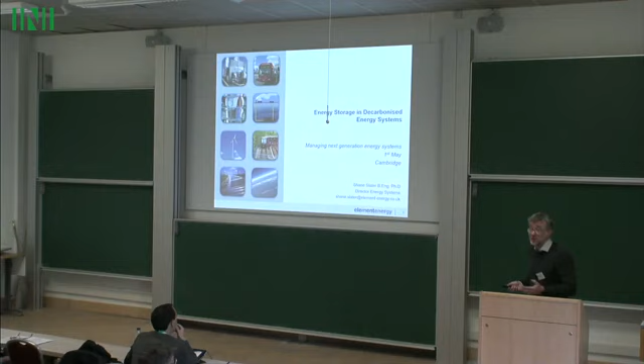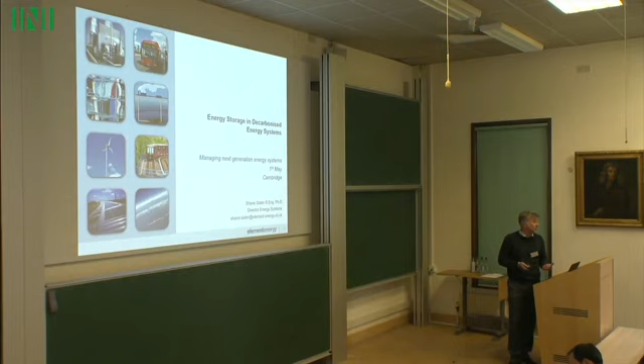So I'm Shane, I'm Director of Element Energy. We're a consultancy, and we focus on trying to solve problems in the low carbon sector, which is almost intractable—pretty hard. Sometimes one feels somewhat in despair that things are moving very, very slowly.

But we focus on low carbon systems and trying to solve some of the problems there. I work in our smart energy systems team. What that means is that across all the areas we work in, we're able to pull everything together, and we try to take a whole systems approach to solving decarbonisation challenges in the energy sector. They tend to be longer term, so we're looking at issues out to 2050, how do we decarbonise, and they're multi-vector—transport, heat and power as well.

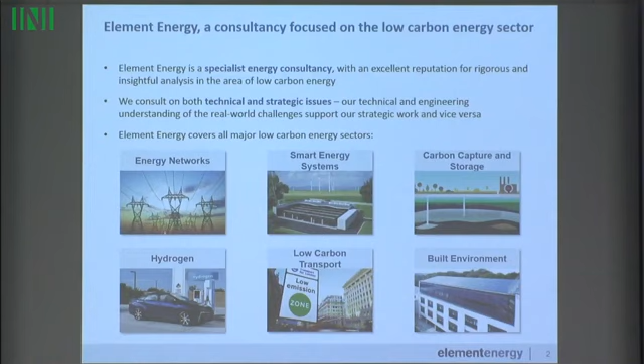I'm going to talk to you—most of the talk today is about one of the projects we've worked on fairly recently. There's three sections to the talk. I wanted to spend two slides talking through what's happening with storage now. It's really exciting—I've been working in decarbonisation for 20 years, and there's not many sectors that have been sustainable, where you can really see things like the train leaving the station. Stuff is really happening, and it's kind of not stoppable. Storage is like one of those things now, and that's really nice to see.

But it's a very, very challenging environment for storage still. I'm just going to talk about the UK for most of the talk—that's kind of now. Then most of the talk is going to be for 2050, looking at the long term, what the role of storage is in a decarbonised power system. That's coming out of some work we did recently. And then I'll end with some insights from that work about how do we get from here to there, because where we are now in terms of our power system and what it would need to look like in 2050 is going to be very different.

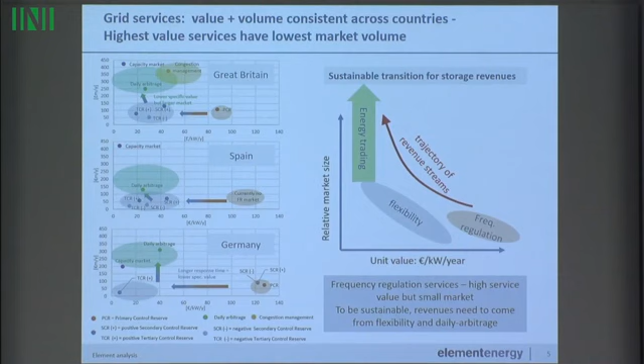So if you look at what that means in practice, on the left-hand side there's an annual report that comes out from one of the industry bodies for storage in the UK. These percentages show various people putting battery projects together have been asked, well, what revenue streams are you reliant on for your battery project? And quite a few said frequency response—these kind of fast-acting, relatively high-value services.

Quite a lot. So this is a service to the system operator. More talked about is peak charge avoidance, so really this is about avoiding charges, network charges, primarily avoiding network charges maybe on transmission and distribution. That's really important. But then there's other stuff as well, like capacity market.

But arbitrage is pretty small, so arbitrage for the moment isn't the big thing that carries you over the line. It might be a component of your revenue stream, but not everything. There's a spectrum of services that batteries need to provide, and I guess you need to stack them on top of one another to make it work.

Without reading all of the stuff on the left-hand side, I guess the point I want to make is that it's really hard to predict where your revenues are going to come from, even in the relatively near term. There's been a lot of people doing an awful lot more work on these markets than I have, and their predictions have been way out from what's actually happened in practice.

So whether it's firm frequency response that has eroded enormously, or rule changes on the capacity market which meant your battery now needs to be almost 8 times bigger or more expensive than you thought you needed to have—and that hurt quite a lot of people—or huge amounts of competition, it's really strange.

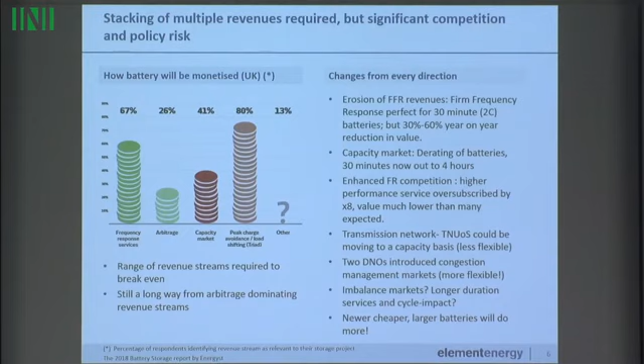There's some really interesting tensions with regards to which bit of the system is going to reward what kind of flexibility. But the main part, I think the opportunity is there. It's still a kind of nervous industry. I think everyone is sure it's going to grow, and people have got their eyes on the medium and longer term, and there's no doubt that battery capacity is going to increase.

So I wanted to look at the 2050 picture now, scoot to the long term and see what batteries or energy storage might do in the long term in a fully decarbonized power system. The slides will be available so you can follow the link as well if you like.

This report was published, I think, last month, and it was a study that we did. It was a pan-European study, so we looked at a whole system approach—electricity and gas—and we looked at a variety of end uses: heat, power, and transport as well, lots of different sectors.

I guess the exam question was, what happens when you decarbonize the electricity sector, and also all of these other sectors as well? And I guess this particular client had a particular perspective—this client wanted to try to balance, I think, a bit of the debate that was happening in the public sector.

They said, look, we want you to push electrification as far as possible. So we want you to electrify, not on the supply side, because that needs to happen anyway, but on the demand side - let's electrify as much stuff as you can, basically heat and transport.

But everyone is aware that particularly heat is tough - I can show you a slide on that in a minute - electrifying heat is really hard. So I guess the hypothesis was, let's see how far you can go with electrification as a core plank of your decarbonization strategy, but then acknowledging that molecules and natural gas is a great way to

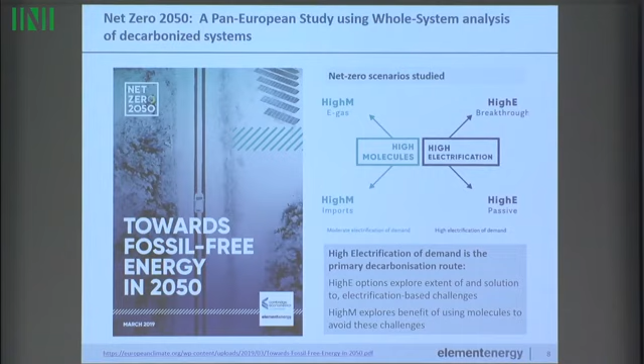get energy to people's houses for heating in winter. Acknowledging that could remain the case in the future, what might be the role for molecules in delivering energy to people? Of course, they would need to be zero carbon molecules, so they need to be created in a different way from now. So just kind of setting up the storage issue, I guess.

So we looked across Europe, but one of the hypotheses we had is that when you have a zero carbon electricity system - reliant very heavily on PV and wind, and more of the things we saw this morning - you're going to need a solution to the system that gives you security of supply for every hour of the year.

So that system is going to be driven by two things that are causing you problems. One is the variability of renewables on the way in - I'm sure you all realize this - but then also you have variability of demand, in particular heat.

And then of course the third variable is that in some countries you have gas infrastructure which is more widespread than others. So really when you look at the seasonality of renewable supply, the seasonality of demand, and gas infrastructure, you can come up with a number of different archetypes or different kinds of countries, and you can see how the solution is different between those countries. That's interesting, because the same 2050 solution doesn't work everywhere.

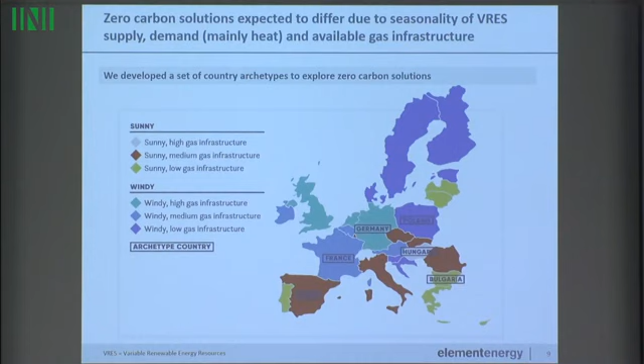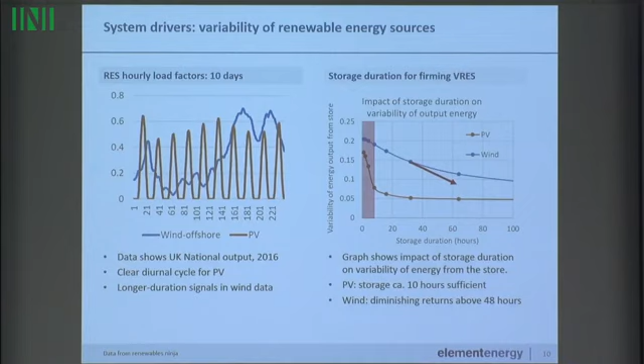You might expect that, but obviously not for wind - it stays fairly variable for a long period of time. There's no right number, but 2 days is a lot of storage if you're going to try to balance wind. Beyond that, you have to ask yourself why you're doing it and what the value would be, because it's diminishing returns and your performance is not improving.

This is the thing that really drives a lot of the solutions: heat. This is a peak day in Germany - we don't know what the actual peak day will be in 2050, but that's what we have in the model. We have baseline electricity demand that we're predicting, but the point is all the reds here are different kinds of electrified heat, and the blues are different kinds of electrified transport. Electrified heat is a big issue - it will double, at least triple, your demand at peak times.

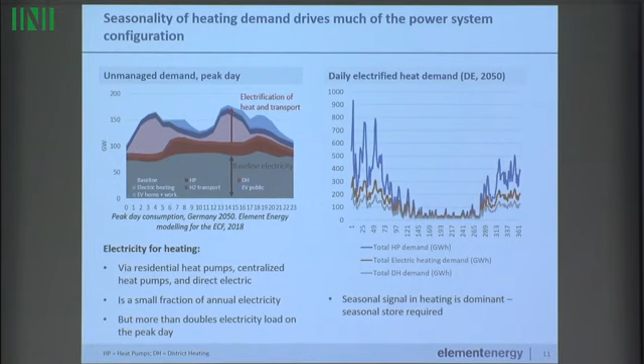That might not be much of a problem, because if that was sustained over long periods of time, you could build a network and get economic value out of it. But the problem is, this is pretty much the same data shown in gigawatt hours over a year, and there's very little heat demand in summer. So you have this seasonality, and if you tried to apply storage duration over longer hours like before, it wouldn't touch this heat signal until you got to 6 months or longer. So if you want to firm up the demand side, you need a seasonal heat store.

I'm not going to go through this - this is the dispatch calculation module we used, the slides will be available. On this piece of work, we'd seen a lot of information on how people dispatch the supply side, but not as much work on flexibility on the demand side. We feel the two in the future need to be treated equally - flexing demand within constraints is as important as flexing supply. We also have a model of networks in there, because networks constrain you a lot if you don't make them bigger.

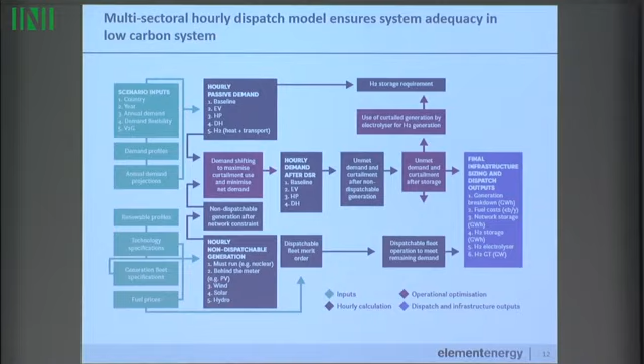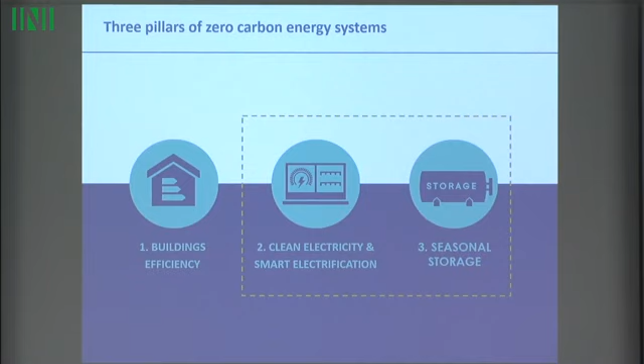Like good consultants, we have to come up with simple messages from our work. The various things we showed are building efficiency, clean electricity, smart electrification, and seasonal storage. I'm just going to focus on the two on the right here.

This is a useful graph - the net load over the year, organized from peak positive net load to peak negative net load. Net load is the load after you've put renewables on the system. You get these two triangles: in this one, you don't have enough renewable energy on the system and need some form of dispatchable backup - you might have an awful lot of biomass. Here you have too much renewables and have to curtail it. Since this is a zero carbon system, the objective is to try to flatten this line, to minimize the area of these two triangles.

There's some demand side response that improves the situation, makes those areas smaller. But after battery storage, it's really interesting - you find, particularly in Spain, you're able to economically deploy a large amount of battery storage because you only need 10, 12 hours. In a country where the optimum supply side plus the seasonality of demand is not so bad, and you have a lot of PV, you can deploy quite a lot of storage and it works very well. But it doesn't work everywhere.

Yeah, sorry - actually, just wanted to pause, I got that wrong. That was actually 10 minutes. 10 minutes, good - that frightened me there. Okay, we'll try this one.

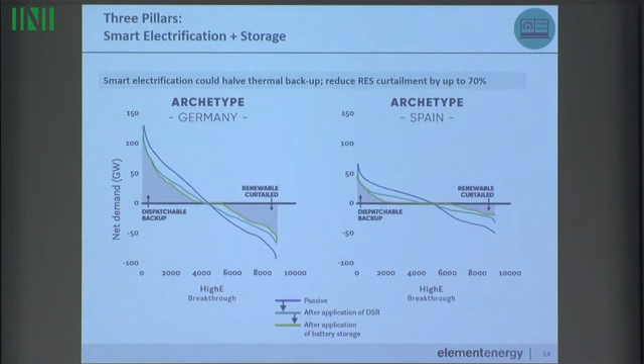Okay, so if we're looking into what comprises the storage - what I mean by short-term storage, a lot of people in the industry would say short-term is 30 minutes or something like that, batteries. What I mean by short-term is up to a few days, something where electrochemical solutions will do the job fairly well.

Again, on the upper graph, we're showing the net demand, but this time it's not organized from largest to least—it's chronological from January to January. What you can see is that you have too much renewable energy in summer. This is all optimized so you have the right amount of renewable energy on the system at lowest cost. You have too much in summer, so the net load is negative, and there will be curtailment unless you put it into a storage device.

And we don't have enough renewable energy in the winter. So what that means for your short-term storage device is that your relatively short-term, 1 to 2 day batteries, are basically cycling a lot. You're building up cycles on these batteries all through those 9 months of summer and mid-season in a fairly linear manner. That's because the net demand is going positive, negative all the time, and you're using that to inflate and deflate your batteries usefully for your system.

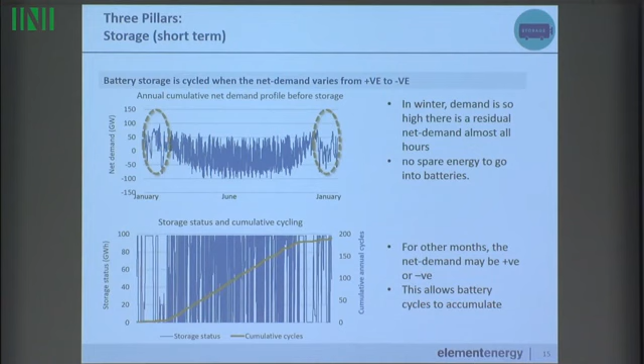But then you're finding these 4 or 5 months of the year where your batteries are ready to do stuff, but they just can't accumulate cycles because there isn't enough variability in the net demand. There's just not enough renewable energy coming onto the system. And so you need another kind of solution.

We offered the system hydrogen as a storage device, as a long-term storage device. So you have excess renewable energy in the summer, you can electrolyze that, put it into a hydrogen store, and then when you need electrons again, you can put that hydrogen through a hydrogen gas turbine and generate electricity again.

We did lots of scenarios, and it's never always clear cut about whether or not you should use molecules or electricity. If you take the whole system into account, it's frustrating that you often have to equivocate a little bit, and it's not always straightforward what you need.

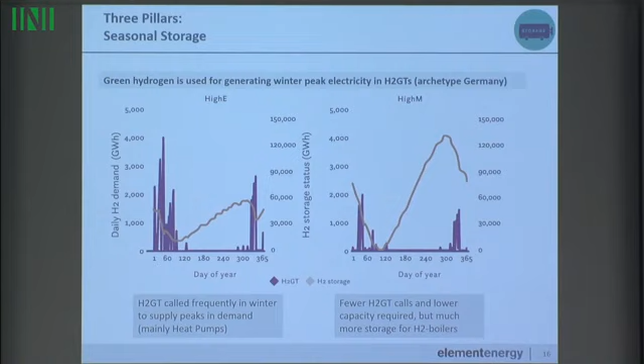Okay, so that was a few slides on what might be required in 2050, and so very briefly just wanted, in the last 5 minutes, to talk about some of the interesting things that might happen along the way. I think I've only got 3 slides left.

The point I wanted to make on this slide is that whether we're talking about transmission network investments or interconnectors or batteries or demand side response, or even if we can get people to agree to buy electric cars and use them as mobile batteries and discharge back onto the grid, these are all sources of flexibility. And the grid's going to need an awful lot more flexibility in the future.

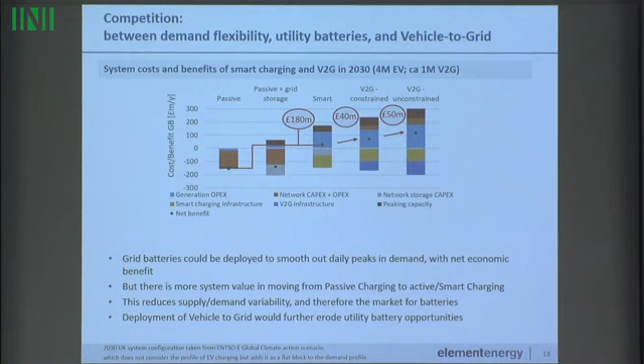So there's competition between different flexibility assets, but even within a single asset as well. The thing that came out of the modeling is that as you deploy more and more storage assets, or any flexibility asset, the marginal value is going down while everything else is fixed. That's because the first tranche of storage capacity is doing an awful lot of work to balance these hugely variable lines and trying to get everything smoother.

But then the next tranche sees that slightly smoothed line, and it's not having to do as much work, and then the next bunch of batteries are having to do even less. That's a problem if you're in the battery sector, because you want these things to be cycled a lot - that's how you get your money back. Otherwise, it's just sitting there.

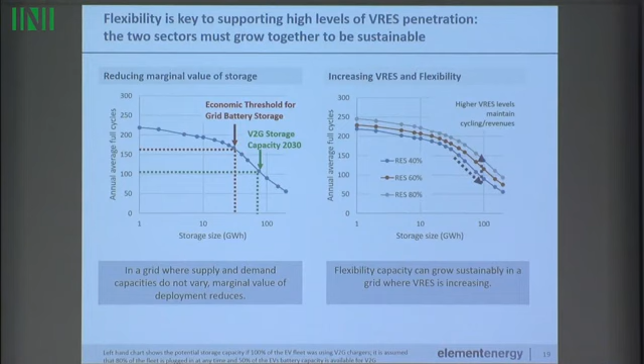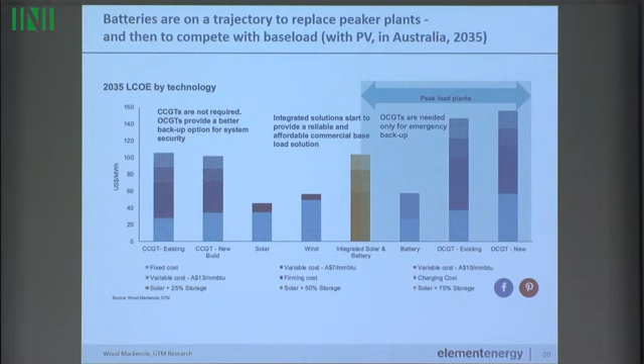And I think that's a very uplifting thing, because we're very close to grid parity on PV and storage, certainly in the next 10 years in a number of markets. As soon as this takes off, not only can we have a storage sector that is sustainable and able to grow sustainably because there's more markets, but we're also going to be able to give grid access to people who need it most as well. So good, that was it for me. Thanks very much.

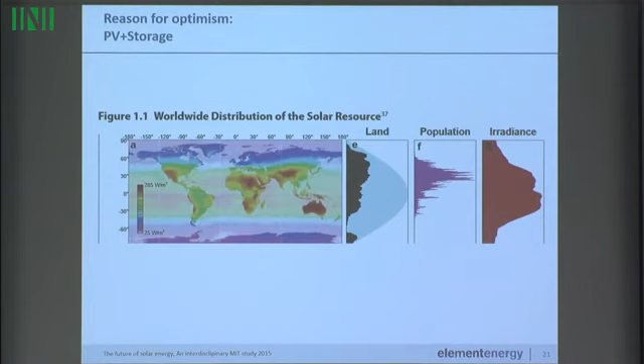You are talking about green hydrogen. I understand it can be green only if you attach wind turbines to electrolysis installations. But do you know of working installations of this kind? Because otherwise electrolysis is very high energy demanding. Yes, that's right - well, they're 70% efficient, so there's high energy demand because there's a high energy content in the fuel you're creating. I know there were ideas of a pilot bus in Aberdeen - they wanted to use hydrogen buses with wind turbines, but it was still just an idea. Are there working prototypes?

There's a number of working hydrogen projects around the world. Although my organisation was involved in the Aberdeen project, I'm not personally very enthusiastic about hydrogen in transport applications, but I am quite enthusiastic about hydrogen as one storage vector, though it has very precise use cases. The challenge, and I'm not sure how to make it work financially, is that as you go towards annual storage, you're cycling your storage less until you get to the point where it's an annual store, inflating and deflating once a year. So how do you make enough money out of that and make it affordable? There are quite a few trial projects, but electrolyzers are still really expensive, meaning people want to use them at almost full load, which isn't relevant for the future.